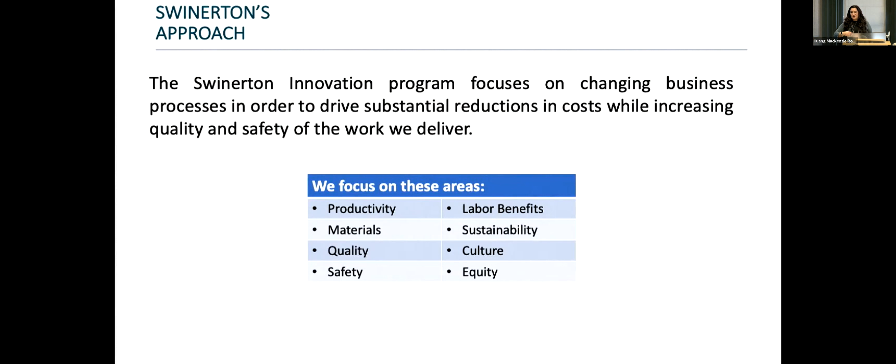About our innovation department, we don't just work with robotics. We're here to really focus on changing processes and looking at the people within those processes. Our goal isn't just to necessarily increase productivity or make financial gains, but we want to look at our field workers. We want to change the landscape of how they're working. We want to change the safety and the ergonomics of their work so that they can have longevity in their careers.

So when Tessa came across us, 3 years ago now, 4 years ago, we were still in the early stages. One of the observations that I made getting into the construction industry was about some of the archaic processes that are still practiced, especially by people still in the field. And so as I was doing my research and talking to actually several of the people in the room here, one of the processes that we stumbled across was this process of layout.

And this layout sits at the intersection between the digital and the physical world, right? We're talking about building off of BIM models designed for manufacturing, but when the time comes to actually build off of those designs, it's still done by people on their hands and knees using measuring tape and string. And so that was an opportunity to develop robotic automation.

And so what we have been building is essentially robot-powered tools for the modern construction workforce. We're creating these layout robots that are allowing foremen to build better, to build off of BIM models by bringing those BIM models out into the field, enabling all the trades, not just one or two, but all of the interior trades to build off of that single coordinated model that everyone in the room is already generating, right? So how can you get more value out of that thing that you're already producing, and how do you bring that data out into the real world?

That in turn addresses a lot of the labor shortage issues that we're already hearing about, that Henning was talking about, that are impacting everyone across the industry, bringing more younger workers into the field. Some of our clients joke that operating a robot is like playing a video game. And so it allows younger people to come into the trades and actually enjoy what they're doing. It's an attractor to them to get them into the construction industry.

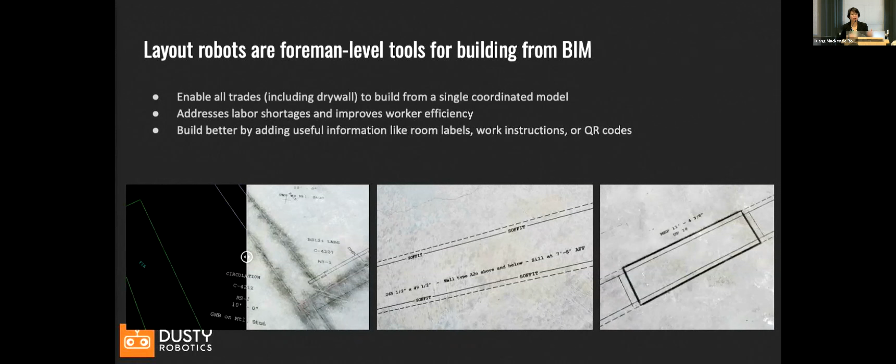And then finally, some of the other opportunities that we're seeing is actually by bringing more of that BIM-based information out into the field, just creating what we're calling IKEA instructions for construction, making it so easy to build because all of that information in the model makes its way out into the field in terms of work instructions, more detail, just better information for everyone on site.

So the picture I have on this slide, I love, because if you aren't familiar with layout, this is how it used to be done traditionally with a chalk line. And I like to show this to people who are sitting in a room full of possible roboticists, because maybe you don't understand what it actually is people are doing. They're hunched over, they're snapping lines, they're using tape measures, and there's a lot of potential for human error.

I grew up on a construction site with my dad doing just this with him. So it's not always a fun day when you're bent over all day doing this. So that's just a little humanization there for that.

So when we were introduced to Tessa, there's two different ways we can look at problems. We can look from the bottom up or the top down. So Tessa brought us a solution to a problem we hadn't questioned yet.

When she brought us this problem, we asked: is this a labor-intensive process? Is it something that requires skilled labor? Is it repetitive? Does it require a lot of accuracy? What's the workflow required in this whole process? And are there a lot of ergonomic issues with this? The answer to most of these was a pretty resounding yes.

So we knew we had a space that we needed to investigate and ask more detailed questions. Part of this process for us as an innovation team is going on site and doing things like time studies. We watch people and measure how long it takes them to walk from point A to point B, or to snap a line, or set up the process. It sounds mundane, but it's actually really important in measuring the solution we brought.

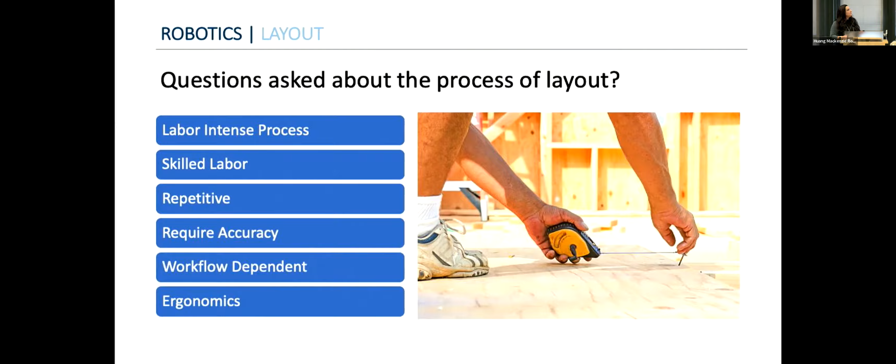Oh. Can I do it later? Okay.

In our three-year long partnership and journey, the first thing Tessa brought us was our initial demonstration. You'll see a picture of our first robot. A lot of people want to be brought solutions that work, but we knew this wasn't going to work 100%, and we had to understand and accept that about this process.

Not always easy for people to be okay with. But while we were watching this robot actually work successfully on a project, which was awesome to see, we asked ourselves: will it bring us increased productivity? Will it bring us accuracy? At this point, no, it wasn't going to bring us either of those things, but we saw the potential down the road. They're the robotic experts, and I was trusting that they could get there.

We did have a labor shortage struggle. We didn't have enough people skilled enough to get out and do the layout for us, and in certain markets we have that struggle more than others. We have unskilled workers doing it incorrectly, and we have to redo it, costing us extra. Then we had to look at what are the BIM requirements, and what would we ask of our VD&C team to implement this type of solution. So a lot of questions at this point.

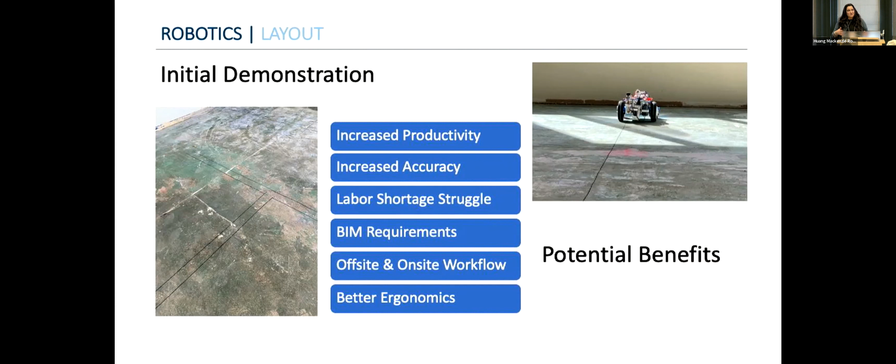So what did we do next? What does any good researcher do? Create a controlled test. Our Southern California team partnered with the Carpenters Union down there, and they invited us in, and we created a mock-up room of layout to perform.

We had Tessa's team come down. We had a team of our workers with a QML, and then a team of our workers doing traditional layout, and we had them run side by side. It was almost like inviting people to a race - one, two, three, go, and see who gets there first. That was kind of what we did with this.

We invited a lot of our foremen, superintendents, and operation managers. We invited anyone we could think of down to ask questions, to poke at it, to rip it apart and tell us all the things they didn't like about it, because that's really important when helping a robotics company develop their solution. I know our feedback was useful for Tessa, but it also helped us think about future workflow we were going to need for this.

This is the second version of the robot with the googly eyes. It's actually printing a radius in this, which is why it's kind of wiggling back and forth. I have a lot of videos of this robot.

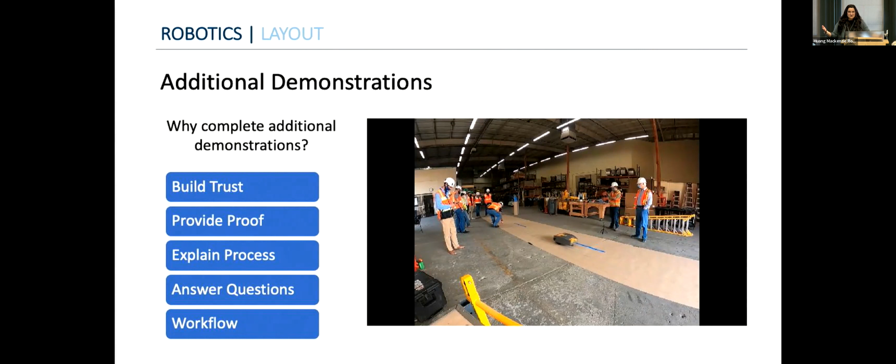So after that, you're thinking, okay, they proved they can do this, but wait - let's spend another year demonstrating a lot. Why would we spend a full year going to our yards and showing this robot to more people? The reason is because this industry is still built on relationship building and trust. So we had to go into all of our different yards, our different markets, and build that trust in person.

We demonstrated this robot, we demonstrated it could work. We got more questions, we got more feedback, we got more details. Sometimes we didn't like the questions we were being asked, but we let them get asked anyway.

At this particular demonstration, we had a fair number of our VD&C folks present who were able to start to dig into the process of what was required of them to prepare their files to have this robot print layout on the ground. People got excited about printing room numbers on the floor for prefab, or helping the MEP folks with their layout. What else could we do with this tool? The excitement starts to build by doing these in-person demonstrations for our own internal teams.

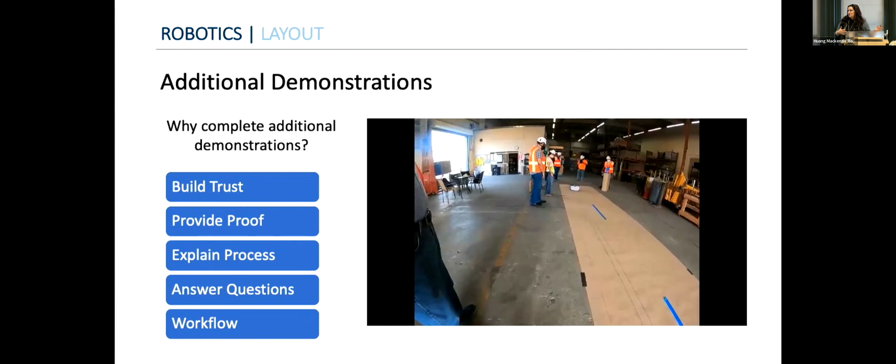Can we keep going? You want to add anything yet? She's like, keep going. Okay.

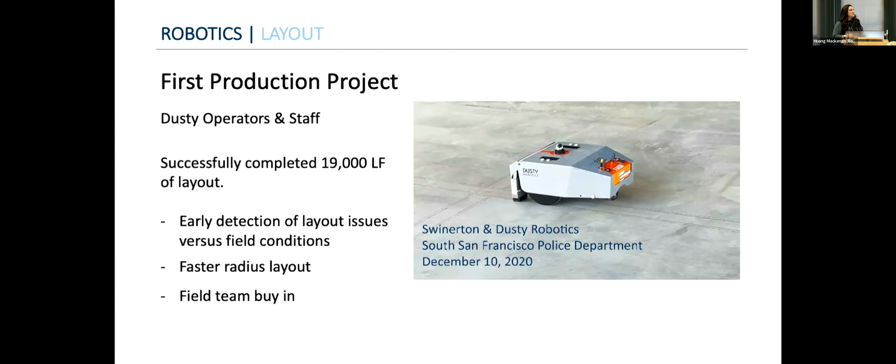And then our first production project. This was the first time Dusty came out and did a full production project for us. It's actually the South San Francisco Police Department, and successfully laid out 19,000 lineal feet of wall.

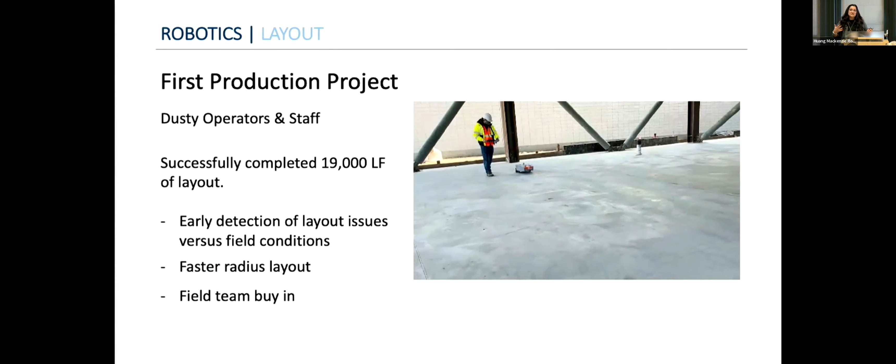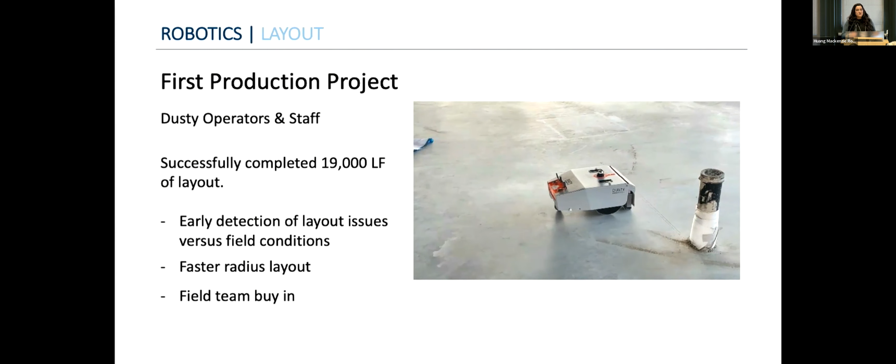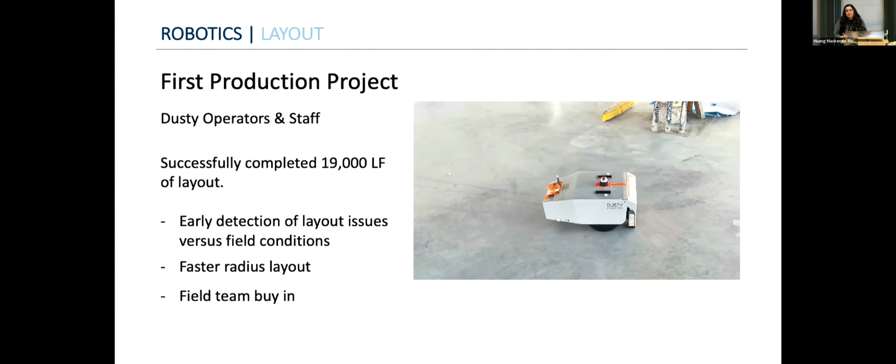Some of the interesting things we found on this project are that we were able to have early detection of layout issues versus field conditions, which was not something our teams were expecting out of this solution. So rather than asking an RFI months later, the layout's already there. They can send the RFI in and get an answer immediately. The radius layout was really fast compared to what a person could do, and the field team started to buy in. There was so much excitement in our company over this as soon as this project happened, and everybody started to talk about it - this was actually where the adoption began.

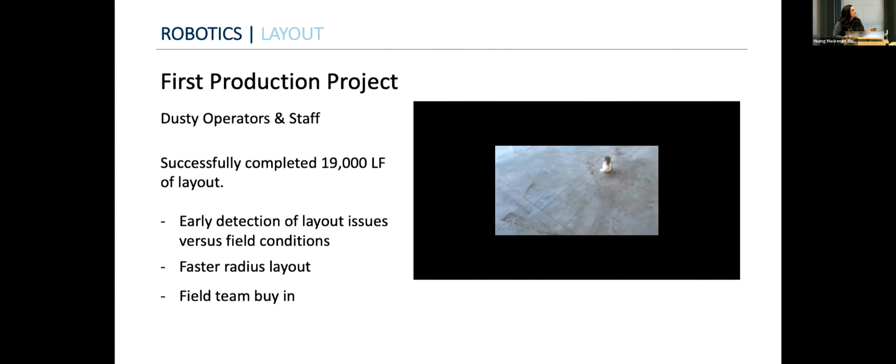And then we get to our adoption and implementation phase. This is where we brought in our VD&C experts, our operation experts, and had our first own internal Swinerton master operator trained - one of our younger project engineers who's really excited about adopting new technologies - trained at the Dusty facility. He then went on to train 7 of our own internal operators.

I'm very excited to say that the first 2 of those folks were women apprentices. So just my own little side agenda - let's talk about robotics as an equalizer for gender in this industry. How many people have heard the discourse that women are not as strong as men? Well, if there's a robot doing it, it doesn't matter anymore. A differently abled person could operate this robot and not worry about having to bend over on a construction site. So we've now opened up doors for a lot more people to participate in this industry, which I think is really important in a discussion we don't often have.

We have a full-time robot on lease - actually, right now, I think we have 3. And with our own staff, we've completed 8 projects to date. We have them in Seattle, San Francisco, and Austin. Sometimes we don't always know where they're at. At this point, we've fully turned this over to our operations group, and I do stay kind of in touch with it because it's kind of my baby, but we don't have to be involved.

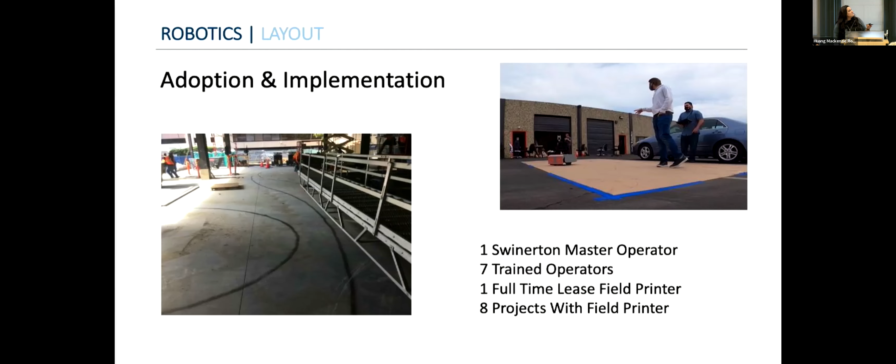Let me go, yeah, backwards. I did.

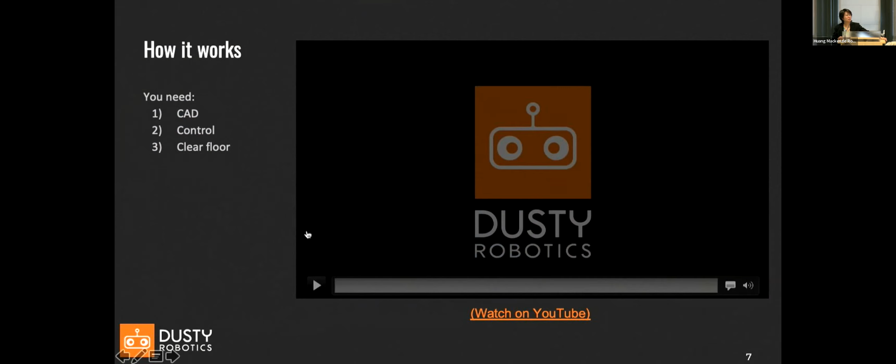So what we learned through this whole process with Swinerton, who's been one of our earliest partners in this - and if you guys can hit play in the back, please - the product that we have right now is really a result of this collaboration that we had with Swinerton, with DPR, and with our other early adopter partners.

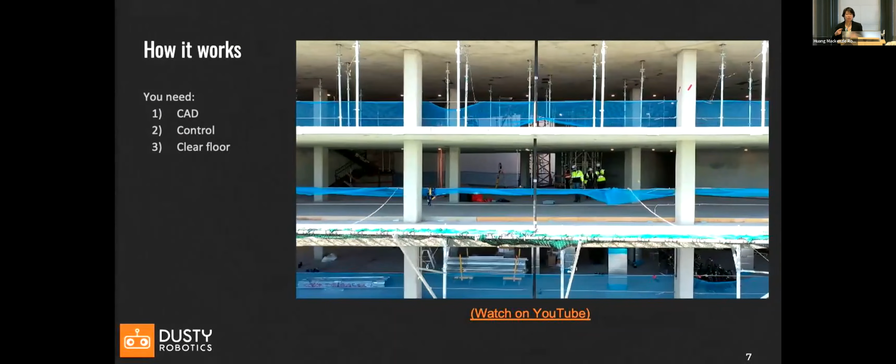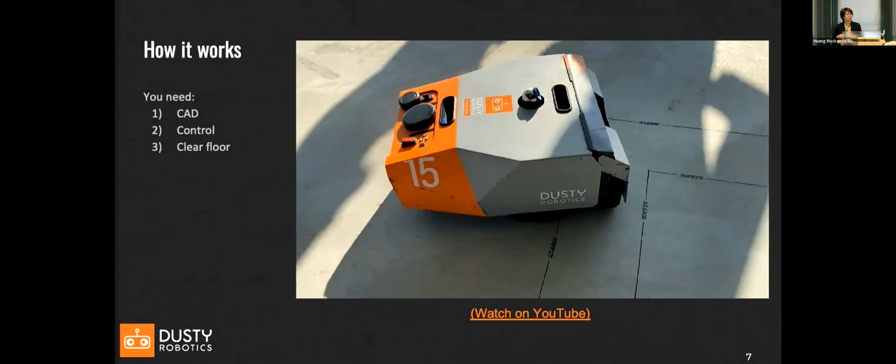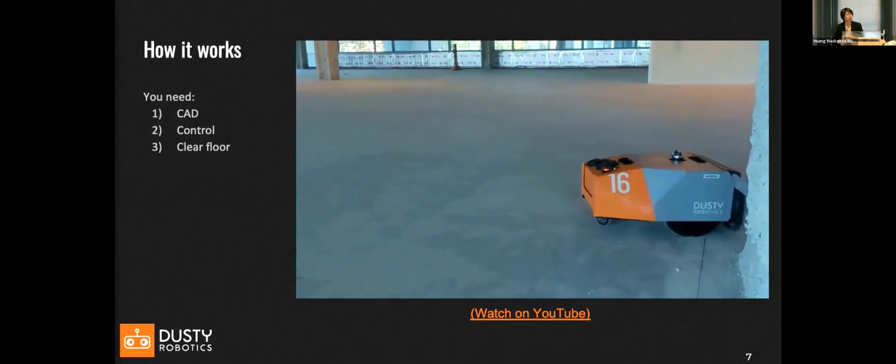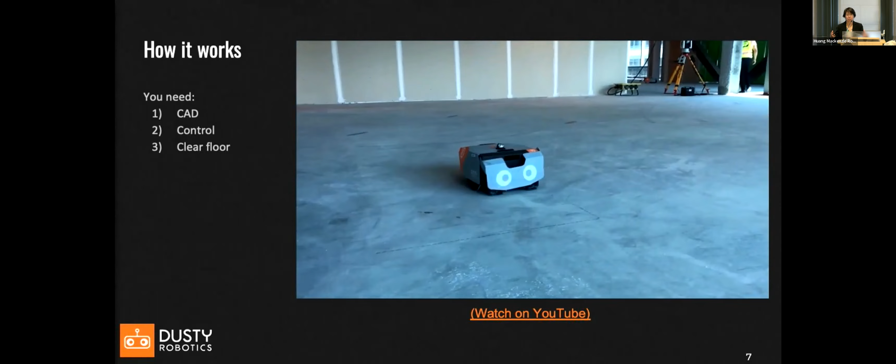It's been critical to us to get that feedback early and often, because what you see here looks like a finished product, but this product was a result of all of the learnings we had throughout this entire process of getting this out onto job sites, seeing how it performed, and understanding what our clients actually needed from it. What we were learning was that it's really about this workflow and how do we automate more and more of it - how do we take out the manual steps done today and replace them with robotic automation or software automation? So what you're seeing here is the net sum of everything we've learned over the past 4 years, working together with Swinerton and our partners to bring this automation into a physical product.

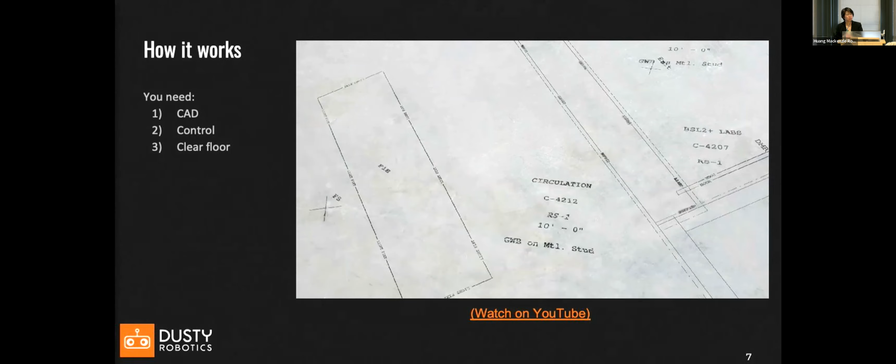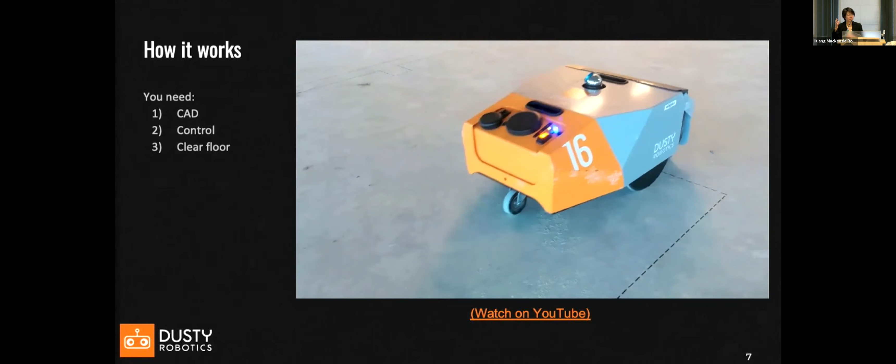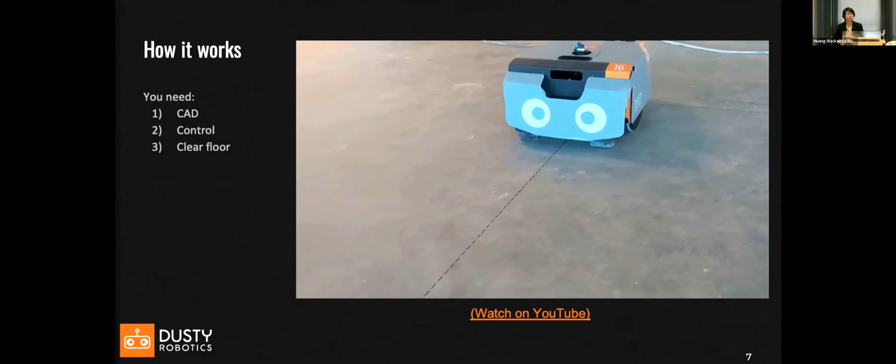So it's really about how do we observe what's going on in the industry, the trends currently happening - more adoption of 3D modeling, labor shortages, challenges attracting skilled labor. How do we bring those all together into a solution that actually makes sense for the industry and solves a lot of these problems that we see everyone having? So with that, we can take questions.